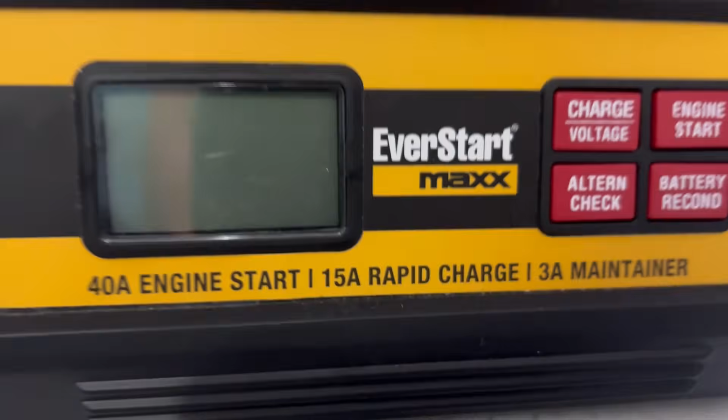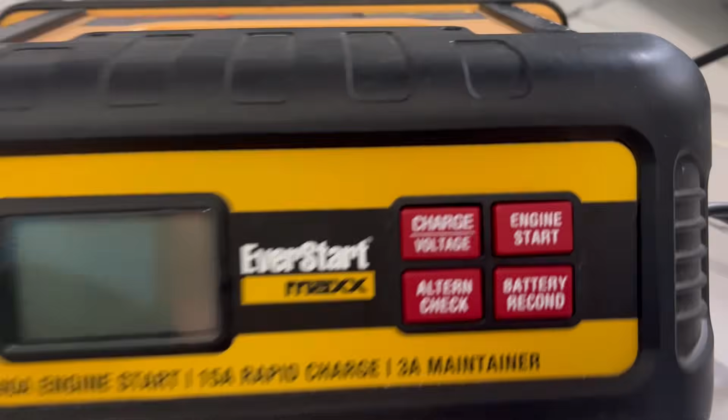Here's the EverStart Maxx: 40 amps engine start, 15 amps rapid charge, and 3 amps maintainer. You will see the alternator check button, the battery recondition button, the engine start button, and the charge or voltage button. Those are the primary uses of this EverStart Maxx unit.

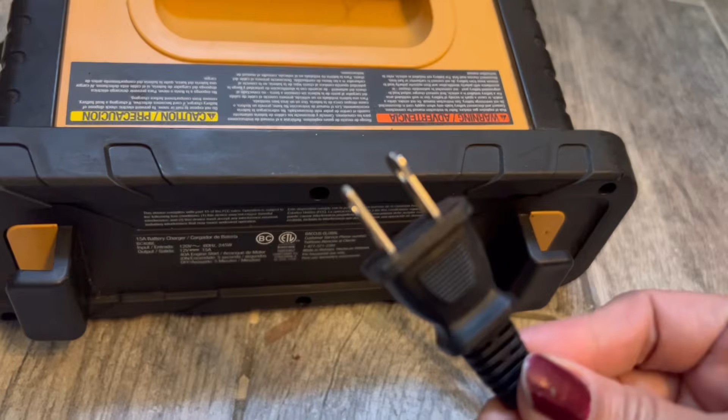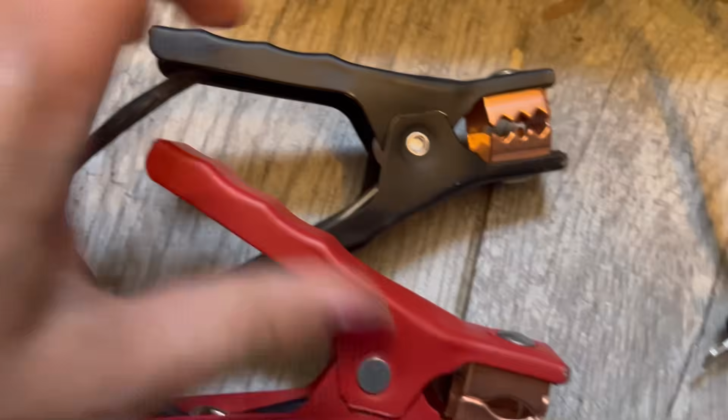At the back of the unit is the 120-volt AC cord storage tabs, and you have the 120-volt AC plug. Then you have the negative black clamp and the positive red clamp. Just a quick reminder, never allow the clamps to touch each other once you have powered the unit on.

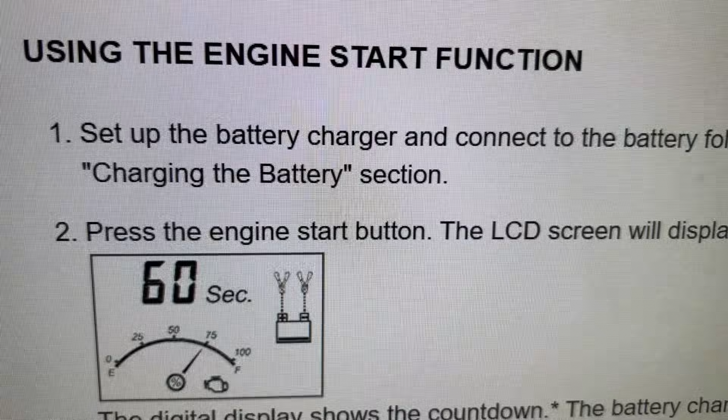If you lost the manual on this one, you do have a way of getting one at manualslib.com, and then type model BC40BE. Here's the manual that you will find when you go to manualslib.com.

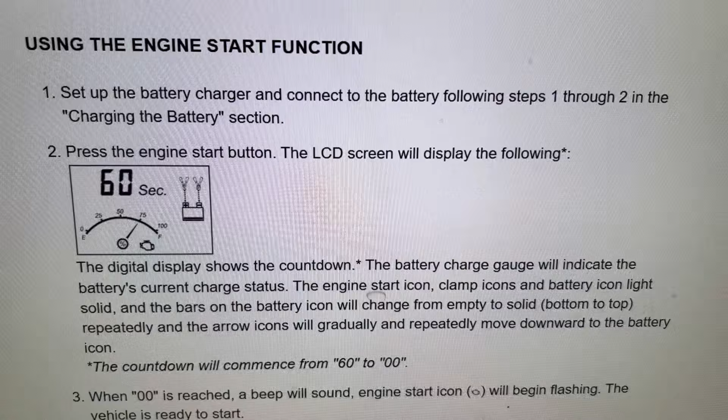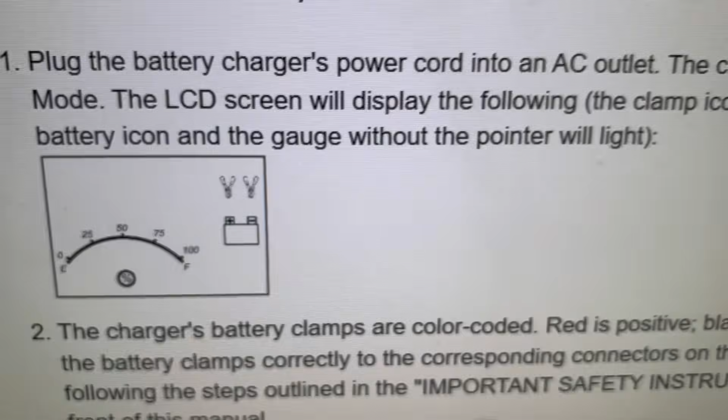I've used the engine start function already when my battery died. So here's the steps. First, make sure you plug the battery charger's power cord into the AC outlet.

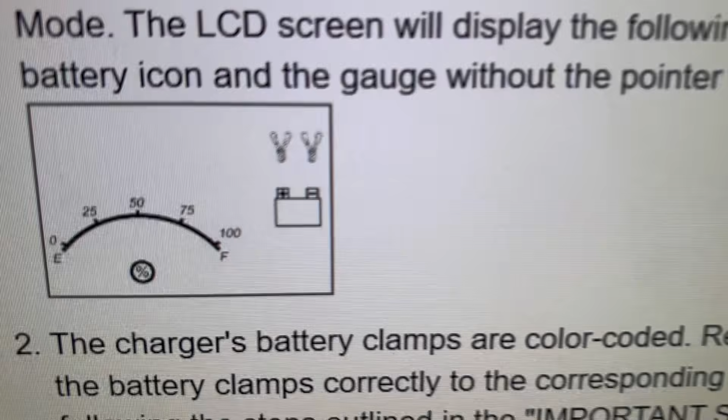That diagram will show that your battery charger is now in standby mode, so it has to look like that. The LCD screen will display: the clamp icon will flash, the empty battery icon, and the gauge without the pointer will light, just like that.

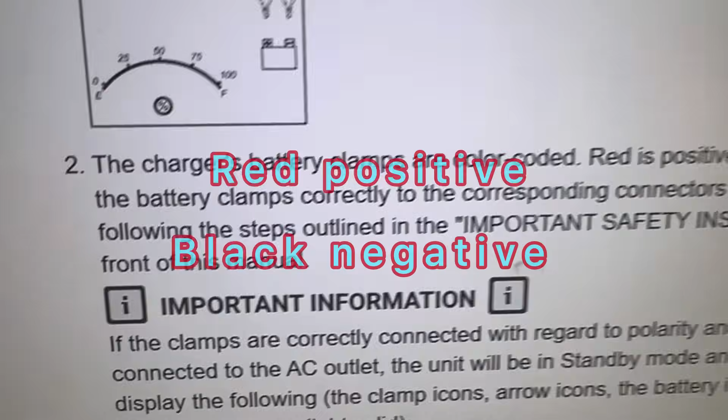Your battery clamps are color coded, so make sure the red is positive, black is negative. You're gonna connect the battery clamps to the corresponding connectors in your car.

If the clamps are correctly connected with regard to polarity and the unit is properly connected to the AC outlet, the unit will be in standby mode, and the LCD screen will display the clamp icons, arrow icons, the battery icon, and the gauge without the pointer light solid. So it's not gonna flash, it's gonna be solid like that.

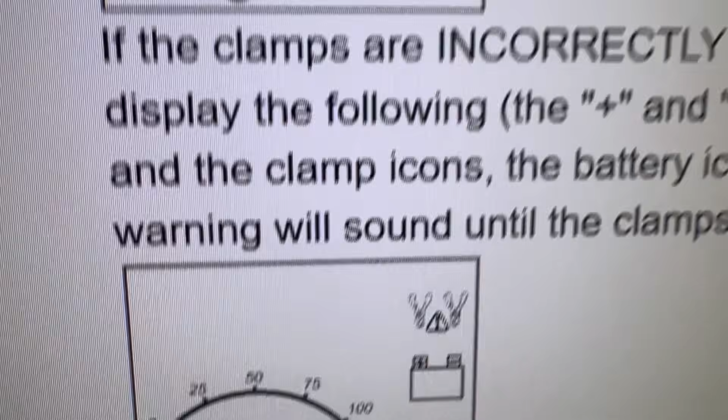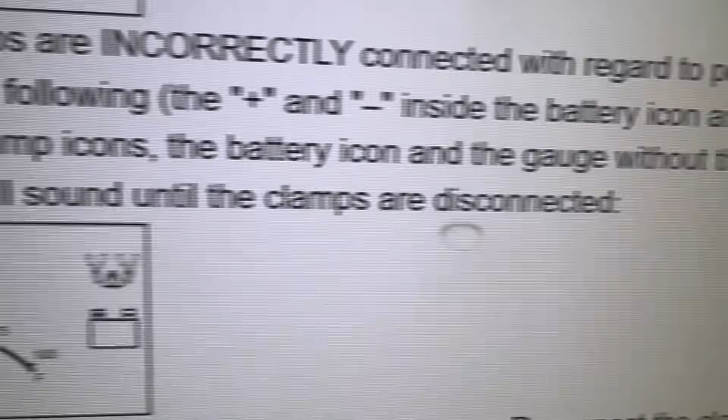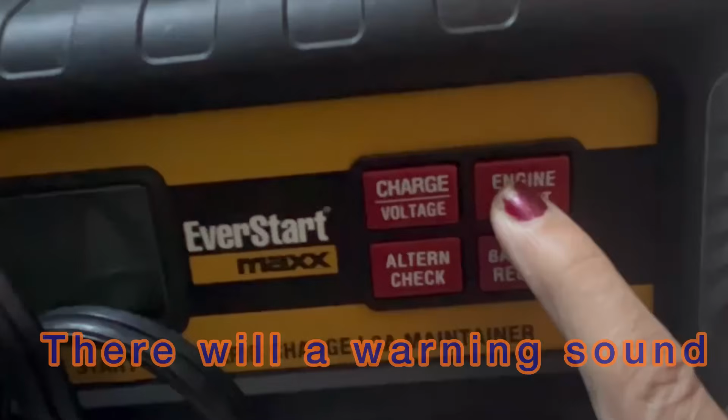After that, you can now press the engine start button. Once you press the engine start button, the LCD screen will display the following, just exactly the same as what you're seeing on the screen.

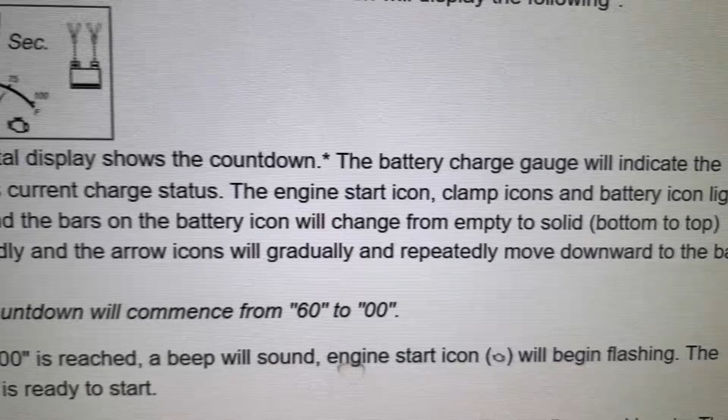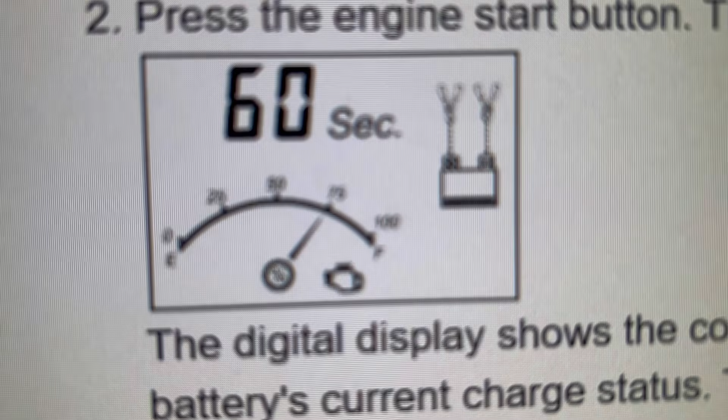The battery charge gauge will indicate the battery's current charge status, and the engine start icon, clamp icons, and battery icon will light solid. The bars on the battery icon will change from empty to solid repeatedly, and the arrow icons will gradually and repeatedly move downward to the battery icon. The countdown is going to be from 60 to 0.

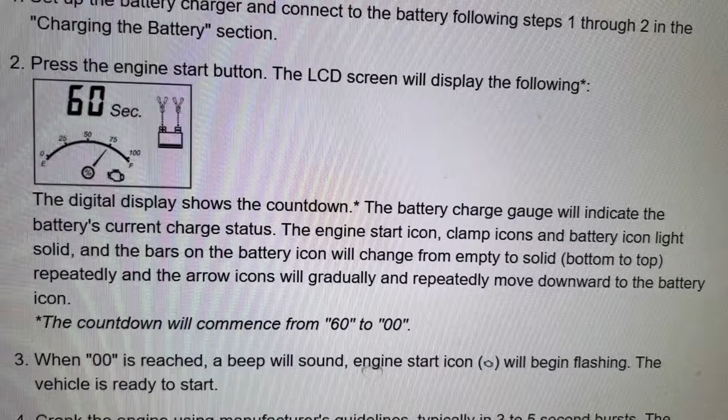When you reach 0, a beep will sound. The engine start icon will begin flashing. The vehicle, your car, is now ready to start. So you will now crank the engine using your car guidelines in 3 to 5 second bursts.

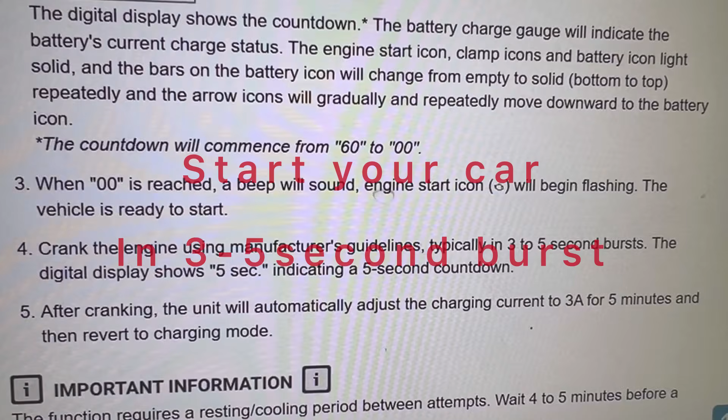The digital display should show 5 seconds, indicating a 5-second countdown. After starting or cranking your car, the unit will automatically adjust the charging current to 3 amps. It's gonna stay for 5 minutes and then revert to charging mode.

After that, you just have to remember some important information. It requires a resting or cooling period between attempts. This is if your car does not start after the first attempt, so you have to rest it a little bit. You can wait 4 to 5 minutes before a second attempt at starting the engine. That is only if needed.

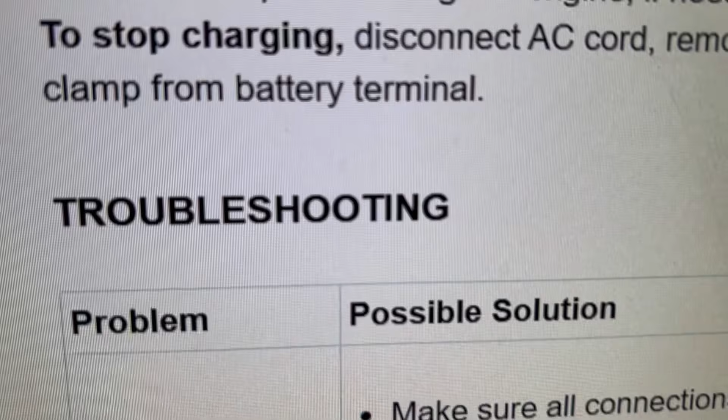I only had to use it once. I started it, waited for the battery to charge, and then disconnected after. Once you're sure that your car battery has enough charge already to run on its own, you can now stop charging. That is what I did.

Then you have to disconnect the cord, of course, and remove those clamps from the battery terminal. And if the unit will not charge, your battery will not charge, you have to keep checking if the connections are secure.

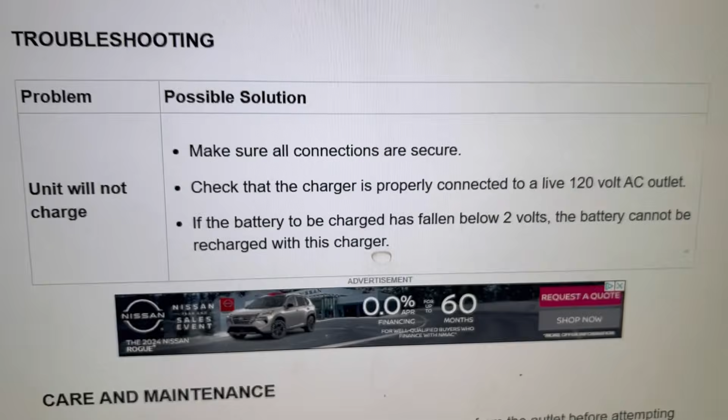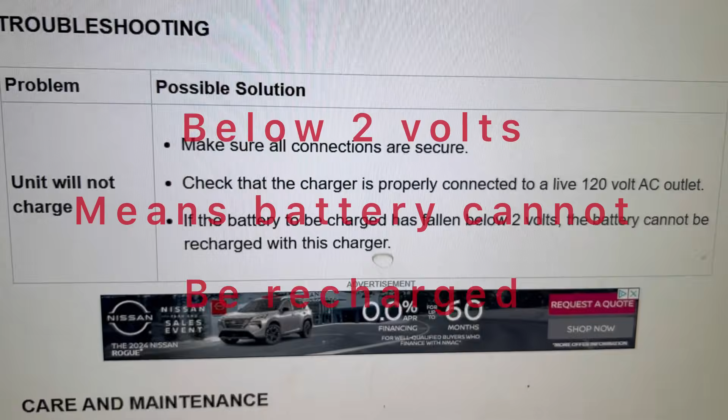You also need to check that the charger is properly connected to a live 120 volt AC outlet. And lastly, if the battery to be charged has fallen below 2 volts, that would mean the battery cannot be recharged with this charger.